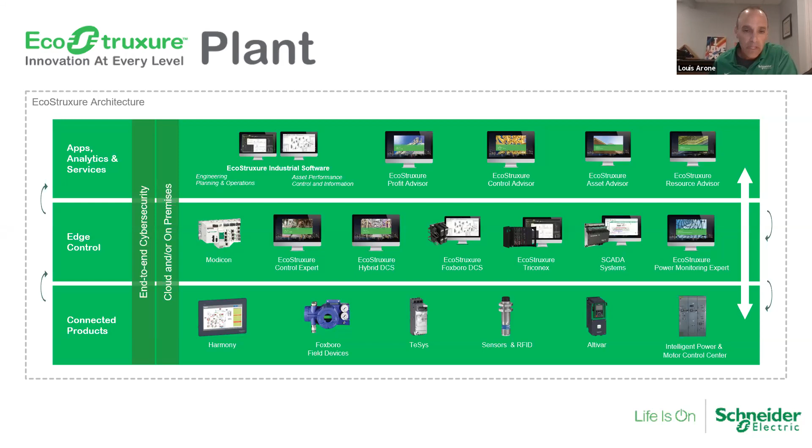We really haven't revolutionized the factory floor, and no one has, quite frankly. It's the same products. And so we believe that the future is not the same as the past. You couldn't say that really when you look at business today. I've been in the business now for over 30 years, and programming PLCs has pretty much been the same. There's been some advances in communication. There's been a change from ladder to the IEC standards.

But by and large, there really hasn't changed a whole lot on the factory floor. But in your lives, you're probably seeing a whole lot of movement, a movement from hardware-centric systems to software-centric systems. And that's really what we're going to talk about today. Industry 4.0, we've been hearing about this for a number of years now, but on the factory floor, there probably hasn't been a whole lot of revolutionary stuff that's come out when you talk about Industry 4.0. But that's kind of about to change. We talk about all the software and the apps and analytics that are coming out.

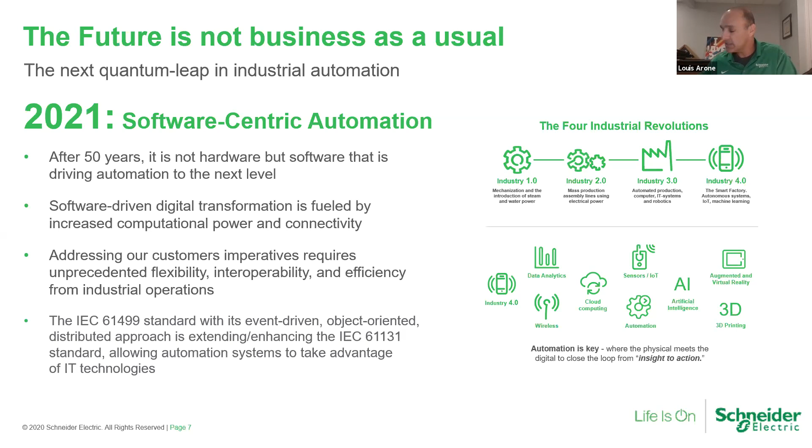Yes, that's pretty cool, but the PLC stuff really hasn't changed. Let's look real quickly at an existing system that you have today. And this, again, by and large, hasn't changed. Let me get a nice pointer up here.

So it hasn't changed. We have a PLC, we have remote I/O that's out here, and we have instrumentation or devices on the floor that are hardwired back to the remote I/O points. And while over time some of these devices have been connected via Ethernet, as shown here, really we're just bringing back a whole lot of data to a centralized PLC. The I/O is dumb. It needs to grab information from the device, and there's a lot of feedback that has to go back and forth. It hasn't changed a whole lot.

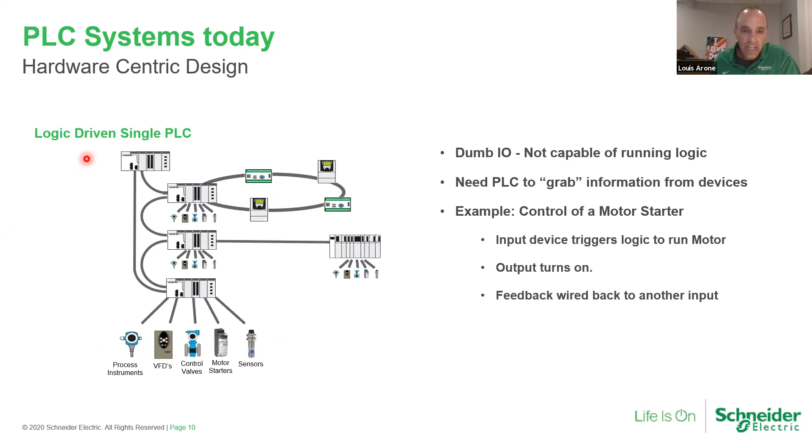When we look at the future—oh, by the way, when you look at all these smart devices that we have, we're plugging Ethernet into these devices. And Schneider Electric—if you look at a system today and the amount of I/O that you have, a lot of it is taken up by motor management, right? Between control of a motor and auxiliary contacts of a motor, or maybe you have speed feedback or something along those lines, it adds a lot of I/O.

And what you're seeing are devices today, and an innovative one that Schneider Electric has released is the TeSys island. Basically it's a bunch of motor starters slapped together with an Ethernet port. You control everything, including your auxiliaries, and a whole lot of information comes back. The only thing that's connected to these devices are your power leads. Really a fabulous device. But can we do more, right?

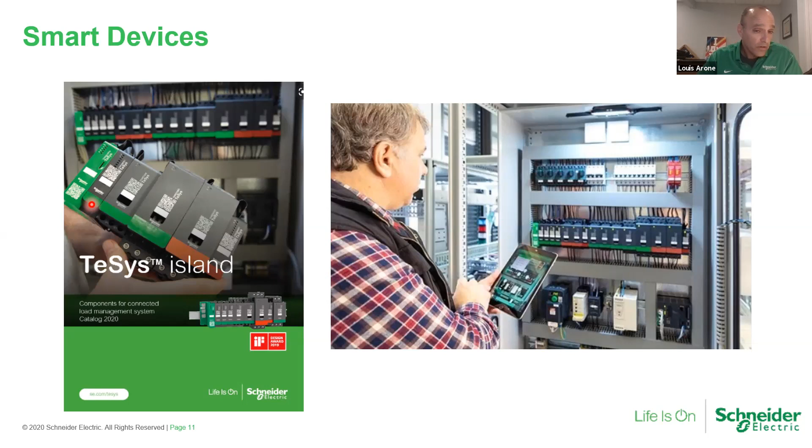Can we go that next step in our journey? Let's just pretend for a second. We talk about these smart devices and we talk about Ethernet being connected to them. In a perfect world, every device would have an Ethernet port to it. So if you fast forward maybe 3, 5, maybe even 10 years from now—I don't have a crystal ball to know when that transformation will take place—but if you look at all the devices out there and they all have an Ethernet port on it, does your PLC look the same as it does today?

Probably in the worst case, no, it doesn't. It looks probably a lot like a switch, where you have many Ethernet ports and all your devices are connected via Ethernet. It looks a lot different. In the real world, we're probably always going to have some I/O associated with it, but it looks different. The plant looks different. So forget the fact that this diagram looks like a cloud—it's not meant to be a cloud. It's meant to be your plant network where all your devices hang off of a network, and it's visible from everyone. Everyone could talk to everyone.

So today, does it make sense—if we talk about the next evolution, in the IoT world, in Industry 4.0—there's a lot of talk about edge control, moving our control to the edge. And we put our PLCs in that edge control box in EcoStruxure that you had seen. But is it really moving it to the edge? I guess so, it's on the factory floor. But can we move it really to the edge, to the point of where we're doing control? And this is where we want to talk today. This is where we feel the industry is going.

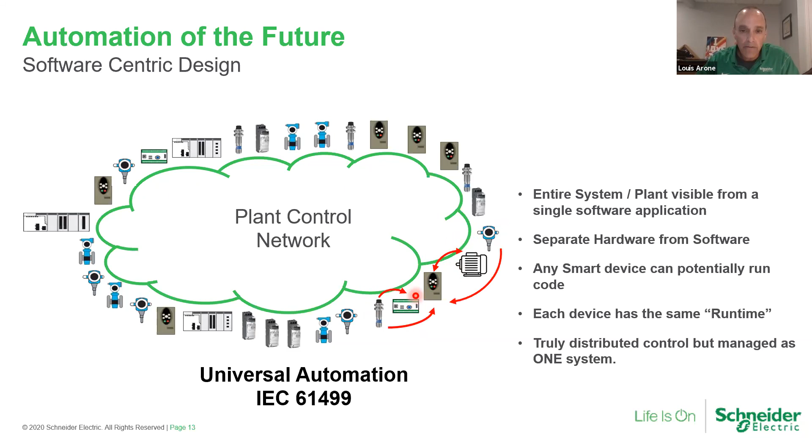But in a true distributed control, a true edge control environment, where everything is smart and everything is connected to each other, why do I need to do that? You have to ask yourself, why do I need to send that back to a centralized area? Why don't I just have them talk to each other? Why can't I send an algorithm that says, hey Mr. Drive, get your level from the sensor, get your interlocks from the instrumentation, and when these two things meet a certain point that I create, turn on, go to a certain speed, whatever. The algorithm actually resides inside the drive. So it's actually pushed to the edge.

That's really interesting, right? Now you're putting stuff out at the edge of our plant onto the factory floor. And you say, how can we do that? We're so used to creating one software in a certain location, and then it gets distributed. Like, how do we do that?

Well, what's enabling these things are standards that are coming to your factory floor. I can talk to you about Ethernet APL. Maybe you've heard about it, but it's a standard, a physical layer of a standardized Ethernet. Today, we all think that Ethernet's standard, but it really is not. There's a lot of different things that are missing from the standard, such as hazardous location, power over Ethernet. Wouldn't it be nice to have one physical layer standard in your control system?

That's what Ethernet APL is going to attempt to do. It's an organization that has many different vendors associated with it. You can go out there and take a look at it, but it handles two-wire Ethernet that can go 1,000 feet. If you have instrumentation out there that has maybe RS-485 on it, it can run over those existing wires. You don't have to pull those wires and replace them with Ethernet cables. Hazardous location, power over Ethernet.

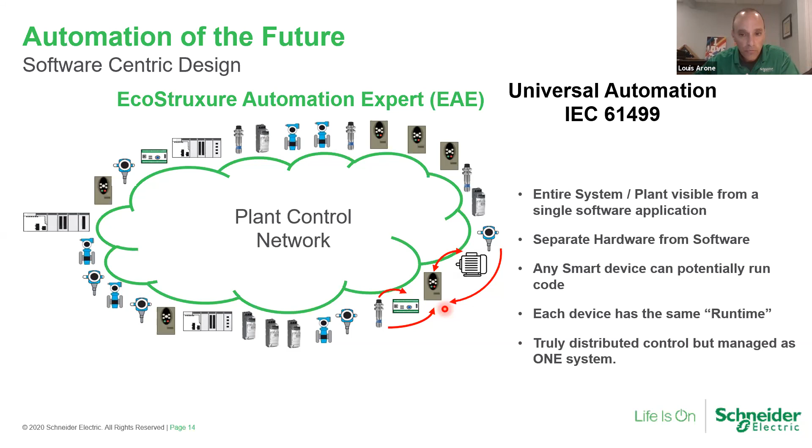Why don't we disconnect this? And so that's what this universal automation is doing. It separates the software from the hardware. It allows people to choose best-in-class products. This is not just a Schneider Electric thing. This is an organization similar to ODVA. Everyone's heard of ODVA out there. It's a separate organization run by many different vendors that are members and that form the direction of the protocols that are a part of that. Universal automation is the same thing.

Now, let's look at Schneider Electric and our offering today. So our initial offering is wrapped around 4 different platforms. One is our ATV DPAC, which is our drives, so we can put control on the edge into our drives - they control I/O and other devices. We have an M251, it's a smaller, lower end PLC, distributed I/O head based on the TM3 I/O line. We have our M580 DPAC, again, based on high performance X80 I/O. And then we have a soft DPAC, which will run on one of our IPC boxes, or it'll run on a server - it can run virtually, in a virtual machine. Highly integrated, highly flexible, and very fast.

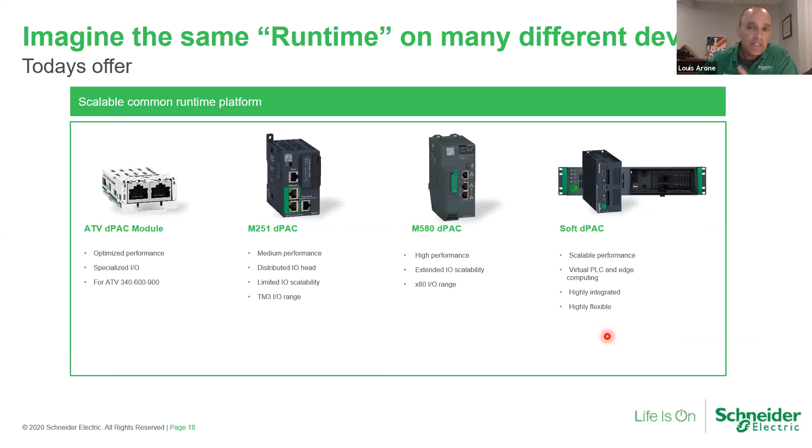So those are the 4 platforms that we have. The whole thing is to drive engineering efficiency, drive operational effectiveness, and to future-proof your investment. So again, if you're using best-in-class products, you're not stuck to a single vendor. As a new product comes out that has features that you really would like to take advantage of, you could use it. And that's really what a whole lot of advantages are.

So we're going to go through, and Frank's going to go through some of this stuff. So by the way, this EAE product is not just control - it also has built into it HMI, and it also has historian built into it. So a very DCS-like platform, but built around the PLCs. It's object-oriented programming, single-line engineering, simulation and virtualization, edge computing. We can talk directly right from the factory floor right up to the apps and analytics layer and not have to go through any kind of middleware.

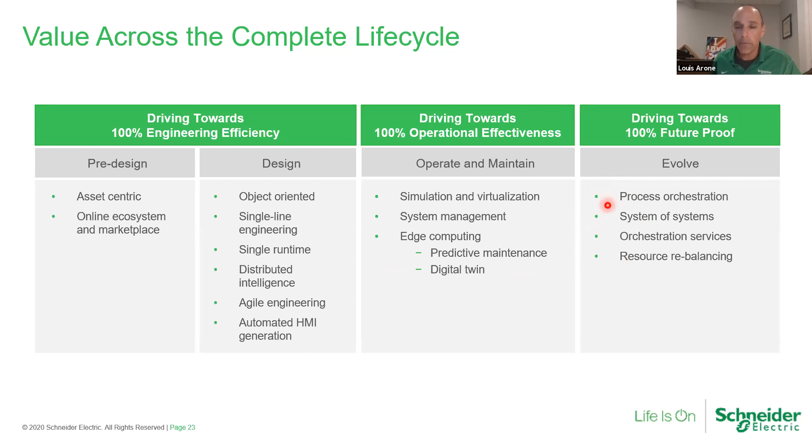And then future proofing, we talked about that. So again, driving towards effectiveness, decoupling the software from the hardware. So today, if you're looking at, say, our PLCs - if you're using our PLCs, they're very tied to the software. You can't use Control Expert without using a Modicon PLC. It just doesn't work, they're tied together. But in the future, they won't be tied together. You'll have the application, which will be EAE, and then you use your best-in-class hardware down on this side. We actually hope you choose Schneider Electric, we hope you have best-in-class hardware for you to use, but that would be up to you.

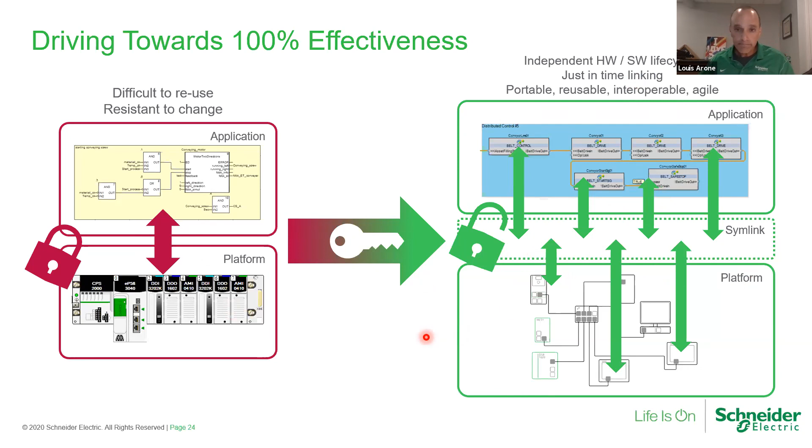So a couple of things that we want to introduce to you before we get into, Frank goes into it. It's something about a CAT, and he'll go into the definition of the CAT object model. But basically, a CAT is an object that has not only your control, but it has all your object properties, it has your documentation, it also has your visualization associated with it. And so you're developing everything at the same time. If you're not making use of the visualization inside EAE, that's fine - then you're just going to be working on the control side and maybe the object properties that are associated with it. Allows you to very quickly and easily duplicate your algorithms.

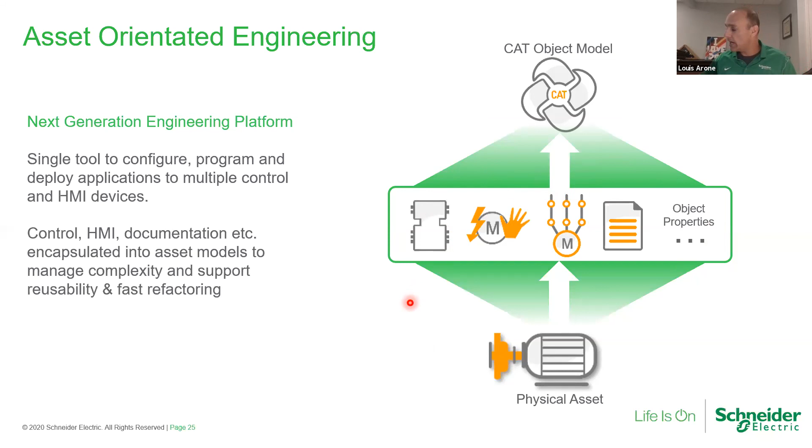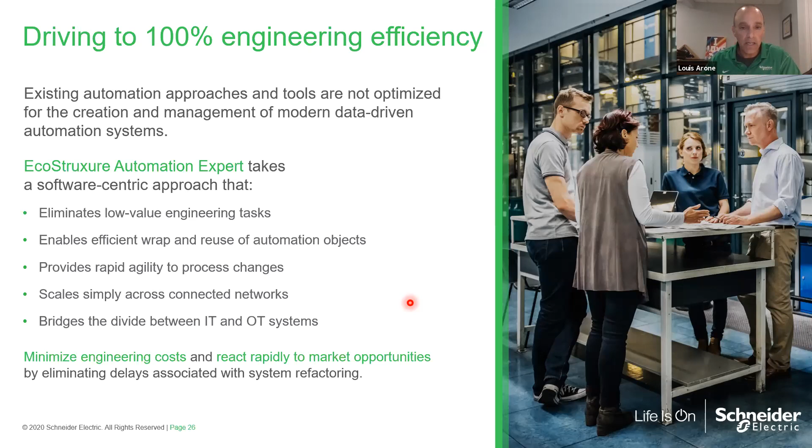Driving towards 100% efficiency. Again, object-oriented programming is all about that - it's wrap and reuse the automation objects that we have within a project or over multiple projects. By the way, we're bridging that divide between IT and OT when we go to this system because you're taking data directly up to the apps and analytics layer. And we'll show you that in a second.

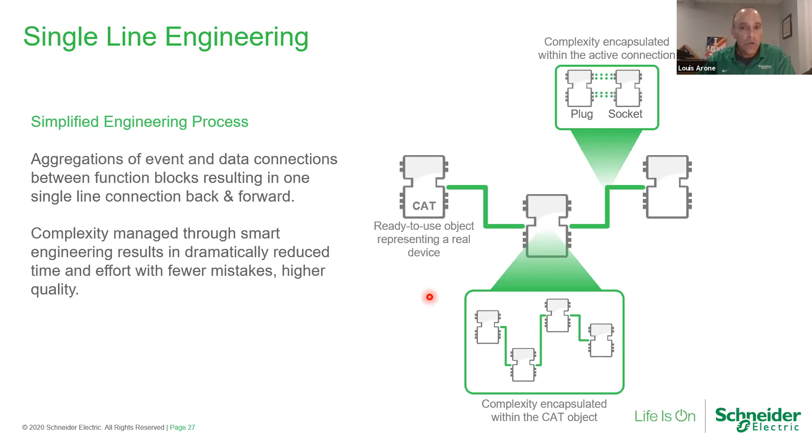So these cats are pretty interesting. Today when you're programming, you have your lines that go between your programming objects, your code, and typically that's a digital input or digital output that you're passing back and forth between your control items. But a cat is more than that - a cat has the control items built in. So these lines that I'm passing between cats are actually a pipe, and that pipe holds all the information. It passes all the information from cat to cat so all your devices can make use of that information.

Where that becomes apparent is when we start to look at our products and how they connect and you distribute them. Remember, we're programming this software as a single package, and then we distribute the control out to different devices. In this particular case, I'm distributing my control out to a drive, an ATV dPAC, an M251 dPAC, an M580 dPAC, and maybe a soft dPAC that's out there. I program them all like they were one package. I have cats that go from one to the other, passing data back and forth. And then I distribute them at the end - told them where they should go run.

The beauty about making these connections with a pipe is that wherever I distribute them, you don't have to worry about the communications - the software does that already for you. And by the way, it passes all that information, it makes that connection so that the system is already connected. In this particular case, I have a soft dPAC that makes a connection from cat to cat out to the M580. These data points are connected, the logic in here is automatically connected. You did not have to write a single bit of communication code to make this happen.

If for some reason down the pike I have to split this M580 - maybe the logic became too much for a single controller, or maybe my process changed and now I want to put distributed control in a different area, maybe it duplicated and now I want to split some of this logic up - no problem. I have my software, I take this logic and I say, you know what, I want you to deploy to a different location. That cat will automatically deploy to a different PLC, and the communications will automatically follow it. Again, you don't have to do a thing.

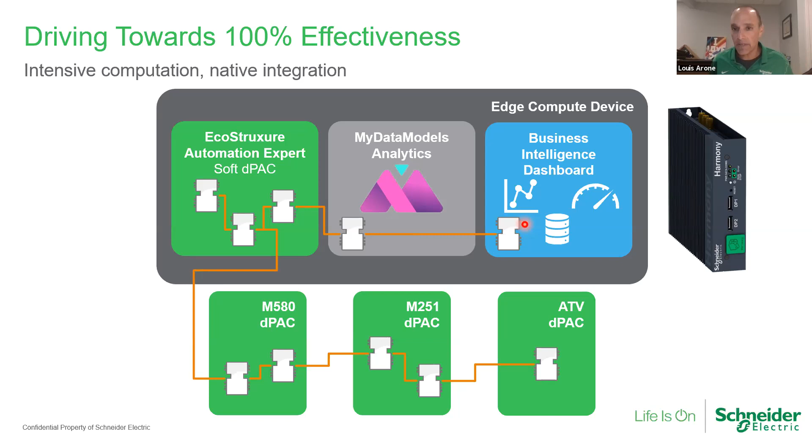So again, just to recap before I pass it to Frank: best-in-class technology, right? We're talking about native object orientation, a modular approach. We're trying to be engineering efficient, and that's what it does. We're Industry 4.0 ready - we believe the factory floor is absolutely going to all be Ethernet. Everything will be connected in the plant of the future. It may not be tomorrow, it could be 5 years from now, but it's coming. Smart factory is coming, the demand for information is absolutely coming - more and more information, more analytics, more predictive analytics on our equipment that's out there. And that's going to require a different way of looking at your software, a different way of programming.

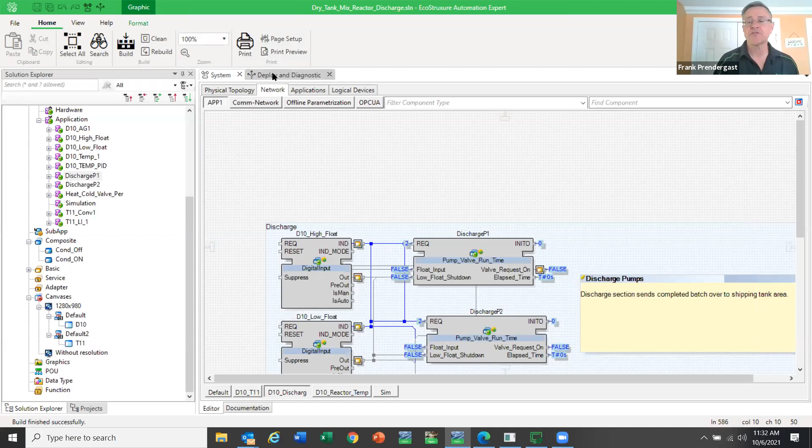I'm excited to show you EcoStruxure Automation Expert. Everything Lou talked about was part of the problem of how we manage a system. You had a central PLC communicating to its I/O - that would be one project, whether it's Schneider software or any competitor, we're all in the same boat. Individual projects for individual PLCs. So when you had multiple PLCs, you had multiple projects. The resistance to go to a distributed architecture was because of that lack of software ability - we didn't have software that looked at the system as a whole, the entire process, all the PLCs, or helped you manage it.

What I'm showing here is our Topology Manager, which shows a small system. We've got a control workstation, a soft DPAC - this would be PC-based control running on a Linux-based machine or a Windows 10-based machine, so it can be any PC basically. Your control workstation would be the build station. Your HMIs out in the field that you would deploy, because the HMI is integrated in, whether it's our native HMI built into EcoStruxure Automation Expert or a link to a Vijeo System platform. So we've got similar objects and graphics already built in.

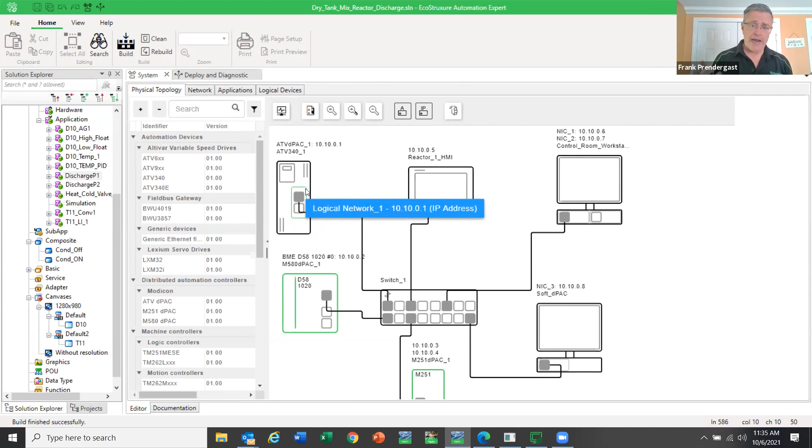When Lou showed our hardware platforms, we have the ATV DPAC, which is a small module that actually inserts inside of an Altivar process drive, allowing full control - you can put any logic you want in it. The nice part with the CAT model is you have application CATs and hardware CATs, those are the two types. An application CAT can run on any platform, whether it's the ATV DPAC, the M580, the M251, or a soft DPAC, and can be interchanged on the fly. So the first part of the problem was how do I look at everything as a system, and how do I then distribute that load - like Lou mentioned, maybe my M580 is getting overloaded. You don't have to worry about the work required to put in new hardware and map that logic to it, because it's very easy.

And I'll show you that. So when we look at this, this is how we manage the overall project, the solution, the system itself, and then how we deploy is done at the DPAC level.

So you can then deploy. What I've done is I've got a simulation running. You can have 10, 20, 30, 40, 50 PLCs or devices. They don't have to be, they can be an ATV DPAC or a soft PC. All of those are available. As you can see here, I've got an M251, an M580, a soft DPAC, and an ATV, just to show.

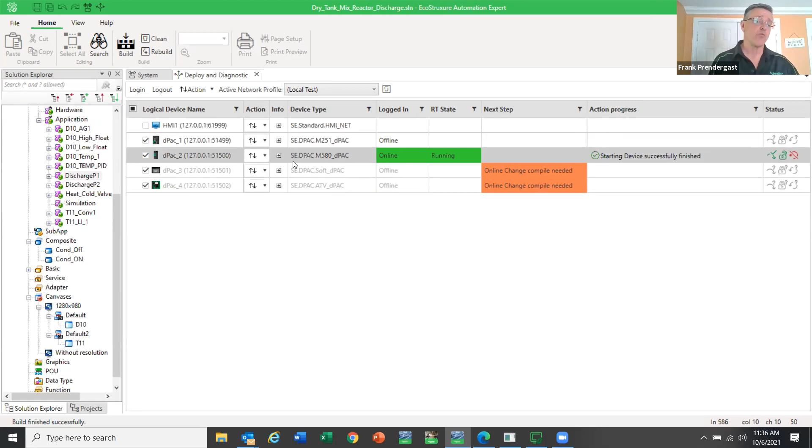And right now I've got all my logic being deployed into this one controller here. I can rapidly change that. So when we look at the system, when we look at an application, now we're looking at layers, right? Or consider them like sections. And this is where the code is, the application code. I'm going to click into one particular layer and take a look at it.

So when we look at this, when Lou was talking about CATs, which is composite automation types, they incorporate everything inside them. So alarming, for example, is not done at the SCADA side or the HMI anymore. It's done in the controller itself. So when you build a CAT, you have all of that built in.

So for example, this is a digital input, and this also is a digital input. It's a high float input and a low float input. I'm feeding that into a CAT that I made, which is a pump valve runtime CAT. And basically, I can distribute these to whichever controller I want just by going to the mapping.

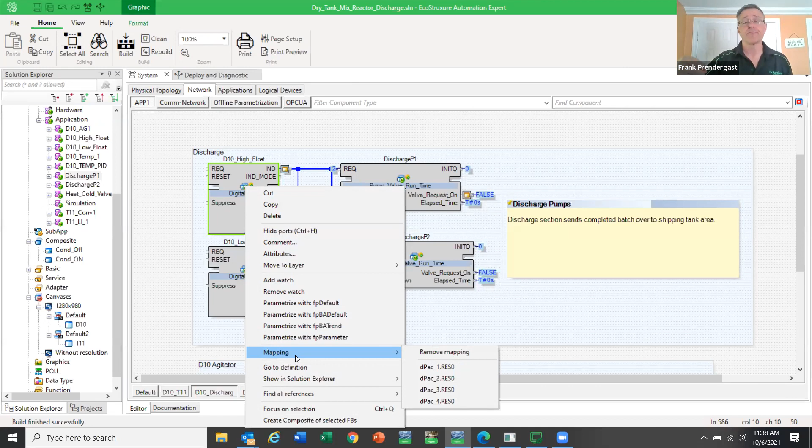So on mapping, this shows you how you can very quickly change that float from one processor to another processor. So very quickly you can do that.

And so when we looked at the factory of the future, being able to have distributed runtimes, this basically goes on a runtime on a piece of hardware like an M580, M251D. Those run the runtime, we then deploy down to that runtime. So independent of the hardware, that linkage where I connect the high float or the low float to the physical input is done at the very end, and it's completely abstracted.

So in order for me to change, say, okay, right now I've got these all allocated to one resource, but I can change this. For example, if I have a problem with that controller and that input point, I can change this to another controller, and then these links become peer-to-peer data.

So what we have is the ability to very quickly change where the logic is being solved, in which resource, which PLC or dPAC, and then the peer-to-peer communication of how those are transferred back and forth. And that's done automatically, what Lou was saying.

So think of that, in the current day, when we have multiple projects, if we have to transfer interlocking data between two controllers, we'll set up Modbus tables, or we'll do Ethernet IP as messaging back and forth. That's a pain, that's a headache. And it doesn't give us the ability to transfer large amounts of data that Industry 4.0 really needs.

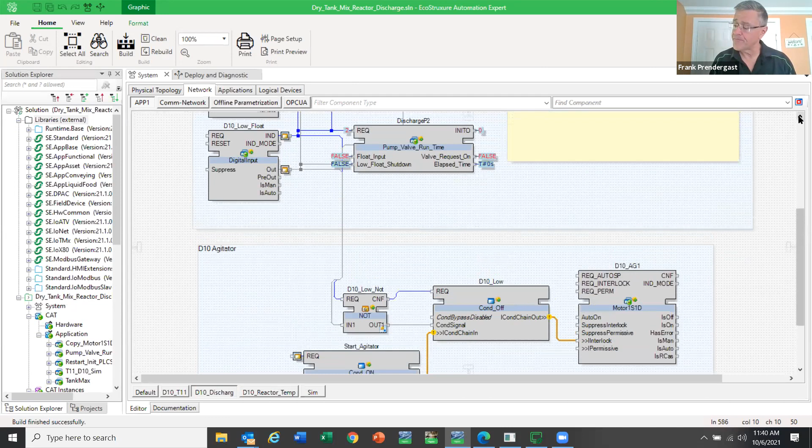So when we look at the ways to minimize those steps, transferring that data back and forth gets to be simple, and it really becomes quite easy.

When we looked at the incorporation of everything inside the CAT, typically what we would do today, whether it's us or one of our competitors, is we develop the logic and the code in a particular project in a controller. We would then export that or have a link somehow to the HMI, to the SCADA. We would then have to link the individual tags to the HMI and the attributes on the HMI.

So this, with the CAT model, actually gives you the ability to incorporate your own graphics natively. So for example, on the left here, I've got the pump valve runtime CAT that I created, and it's a pretty simple CAT. Now I'll go into it here.

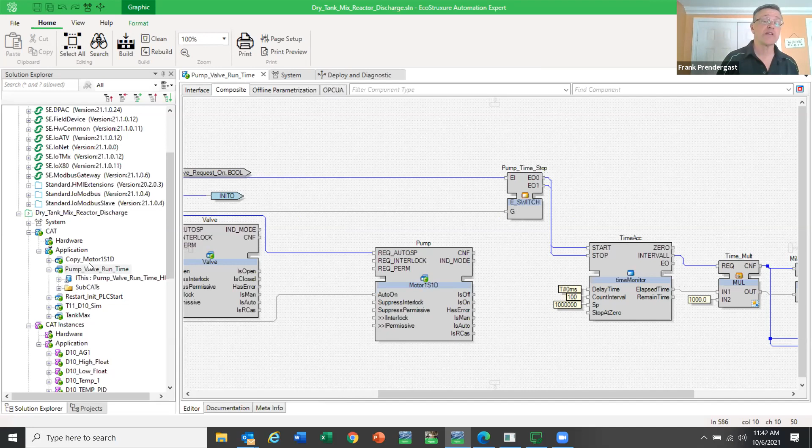Really all it's got is a valve CAT inside of it, with some conditioning signaling, a motor, and a runtime accumulator to show that. So this shows that if you have another pump and valve you want to instantiate, you basically drag over an instance, drag that CAT into a section or a layer, and give it a name. Once you give it a name, that refers to all the attributes inside that CAT and gives access to all of it. One of the big features of this is what we call single line engineering.

Single line engineering consists of creating a CAT, and you can nest CATs within CATs, and all the accessibility within the CAT from all the attributes in the CAT is available. So linkage to the HMI, you don't have to worry about.

OPC UA connection - what we didn't mention is that in our EAE runtime, it's natively built in to accommodate as an OPC UA server. So that high level of cybersecurity is there. We offer today, for example, an SL2 level of cybersecurity with EAE, so we have a certificate that you need to trust when you initially set up your system. That gives more levels of cybersecurity in addition to the functionality you have today.

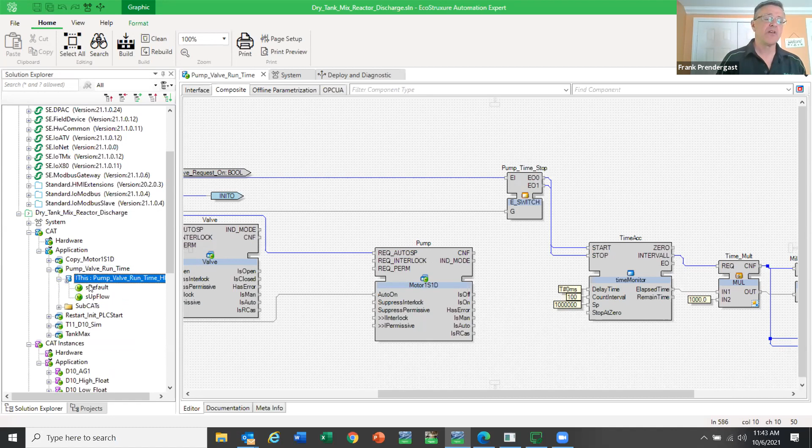When we look at incorporating inside the CAT, I've got these motor valve CATs in there, and then I can have a particular HMI view. So when I build a CAT, I've got the alarming that is inherent in the object itself, and then I've got the view that I want to display. You can have multiple - you would create a symbol, and that symbol can be whatever display you want.

You can modify - what we show here, for example, the motor copy of the motor 1S1D, is where our libraries are open to the point that you can take one of our library CATs that we made, copy it, and then change and modify it to what you want. If you didn't like the colors, for example, in the HMI, or didn't like the HMI display, if you wanted to tweak it, you can make that your own library.

When we talk about libraries, again, this goes to the future-proof concept. Future-proof really is about how we're not tied to the hardware, which is a big part, but then also how we can use the same runtime with different pieces of hardware and still run that same code. So that really makes the future-proof part of it.

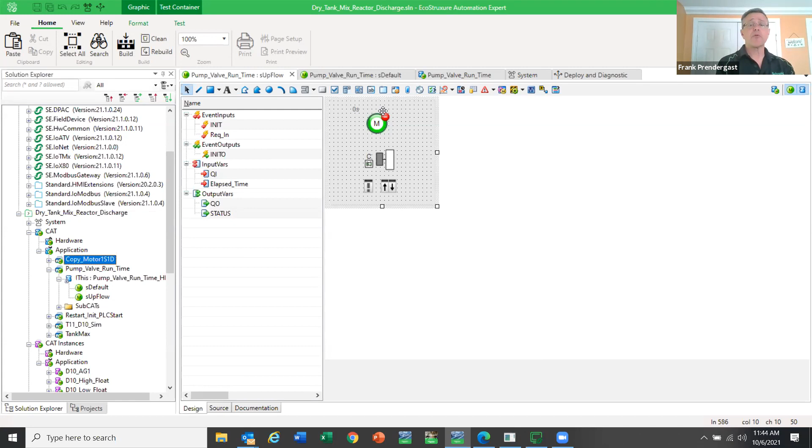With your libraries, you can lock them in to a certain version number, and then from version to version it will port when you want to go to the next version of EAE. You'll take your old libraries that are locked in your application, or used in your application, and all of that provides that ability for you.

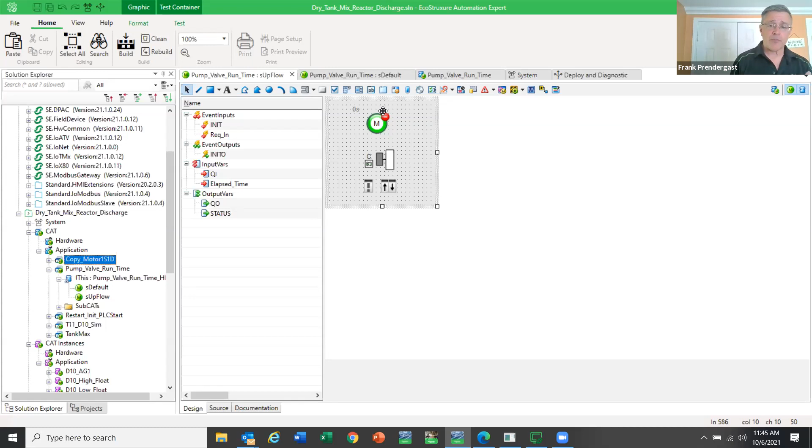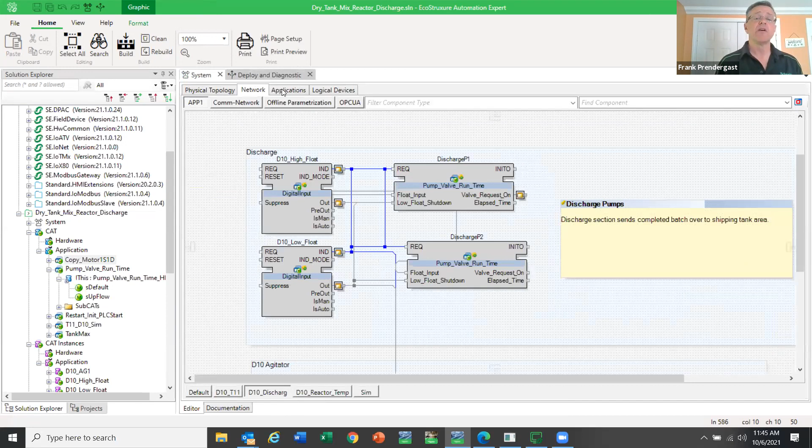The peer-to-peer communication is inherent, right? So when you link a CAT to a CAT, whether those two CATs are in the same system or in the same resource, for example a PLC, these are in the same PLC, so there's really no peer-to-peer, it's all handled within. Change one of these over, and automatically that peer-to-peer messaging is taken into account.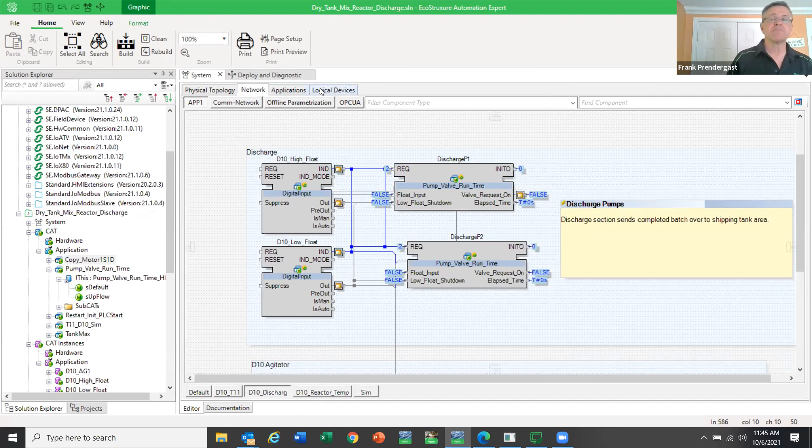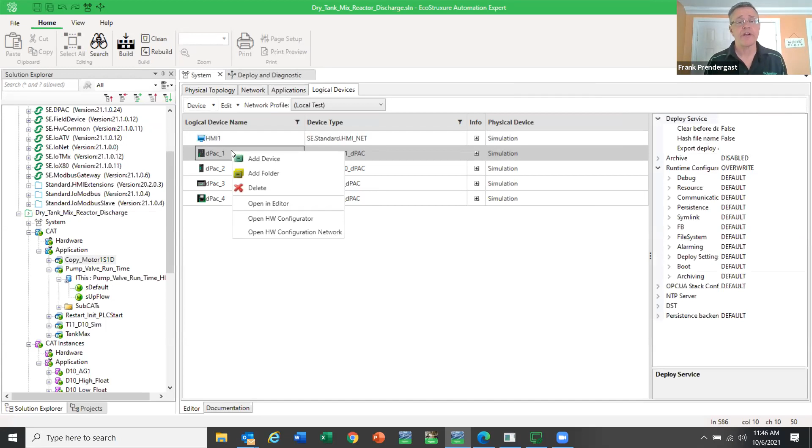Let's take a look at the hardware abstraction layer. So there are application cats and hardware cats. Application cats are completely independent from the hardware, not tied whatsoever to it, and they can run on any runtime. A hardware cat is specific to a piece of hardware - for example, an M580 cat, or an M251 cat. When you install the hardware cats, this gives you the ability to map the IO.

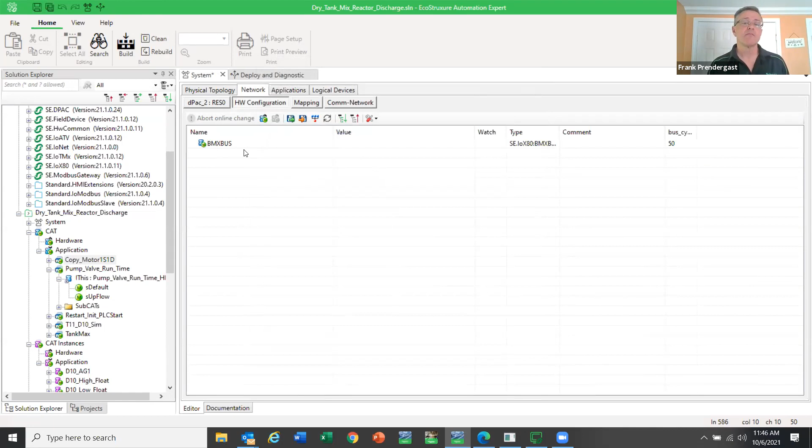Let me see, where's the other one? So I'm going to map, for example, I'm going to add an M580 X bus. Actually, you know what, I'll go back. So this allows you to configure the hardware to say, okay, what IO modules do I have?

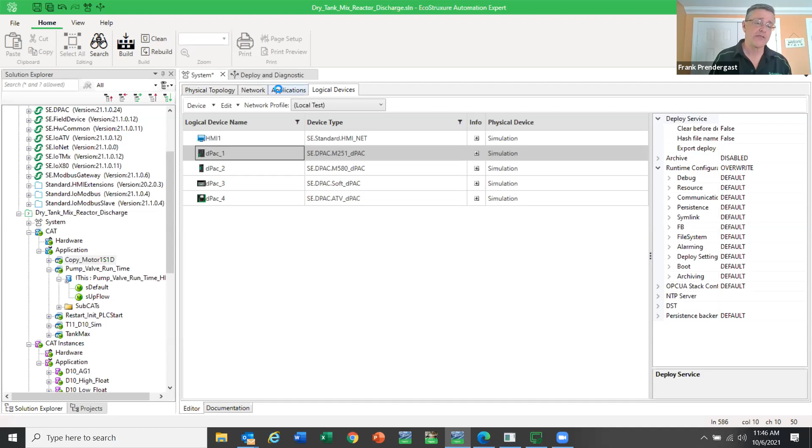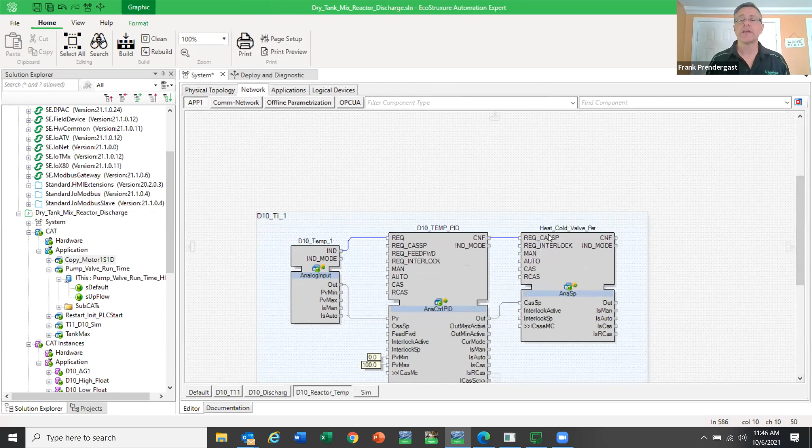Then after you've done configuring the individual modules, scaling on the modules, all the inherent stuff, then what you're going to do is link using what we call our symbolic links. The symbolic links then tie to the attributes in the particular application. So, for example, the output of this analog set point is a heat-cold valve, and that can be linked to an output, for example an analog output.

That linkage is what makes it so easy to have a truly distributed system, because you've decoupled the hardware from the software. The only link is that symbolic link that ties the hardware to that. So again, that makes you able to distribute the load very quickly.

Think about if you had multiple, let's say 10 PLCs. One of the PLC systems you have today is getting overloaded, too full with logic. It's slowing down, you need it to be faster. Distributing that logic over to another project, what a pain, right? You got to manually move the code from one project to the other, then do the hardware mapping. It's quite extensive on what you need to accommodate, and lots of mouse clicks. So single line engineering gives us the ability to really encapsulate everything in a system so that you can readily duplicate it. That makes it so much easier to handle.

The IT linkage, what we needed with our new generation of PLC programming with EAE, is the ability to look at IT technologies. How we can very rapidly get access to all different protocols like MQTT, for example. How do we link to a database, call a DLL? We really didn't have that kind of capability, and the existing system we have today doesn't show you that. So the complexity of that, or the lack of being able to connect, really limits the amount of data you're able to get access to.

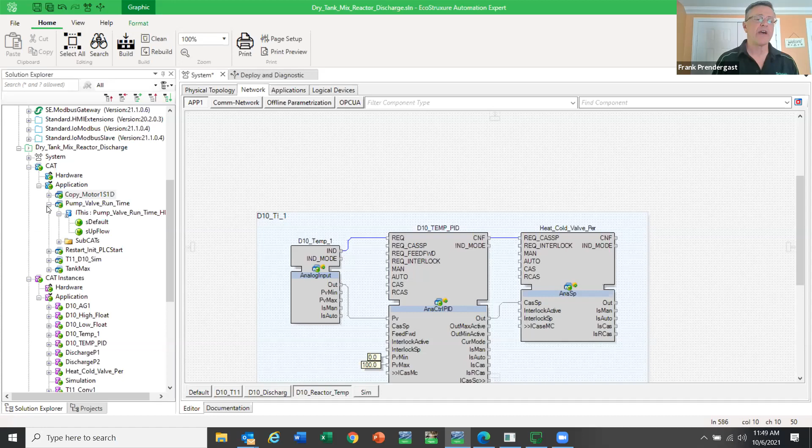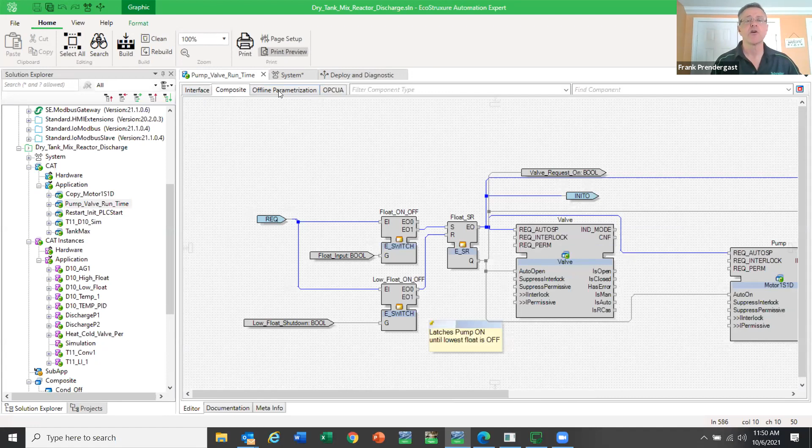We've got 3 types. We've got a CAT, the composite automation type. When we look at that CAT, that really gives you everything—it gives you the offline parameterization, for example, gives you the interface, what input pins, output pins they are. Look at the composite being what's the logic and the code inside. Offline parameterization is kind of like the initial values storage. And then access to OPC UA, so it gives you whether or not you want to expose it to an OPC UA client, for example, or not. All of that is built into the CAT model.

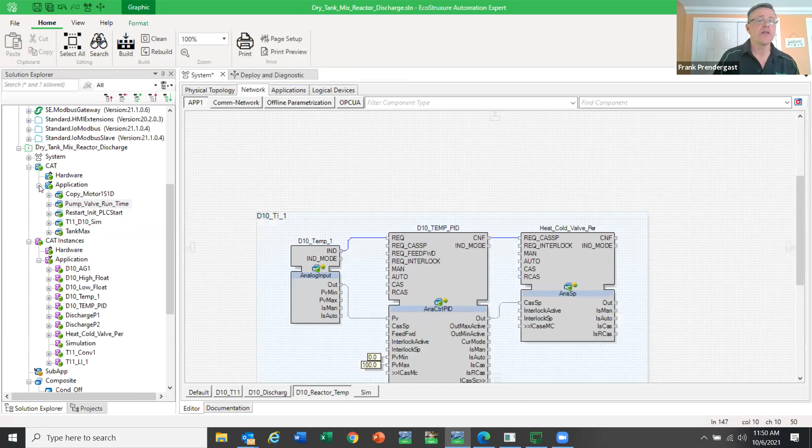We've then got underneath that another type of object, a composite type. An example of a composite really looks about the same as what you had with a CAT, except you're missing the offline parameterization and the OPC UA. That really is the difference between a composite and a CAT.

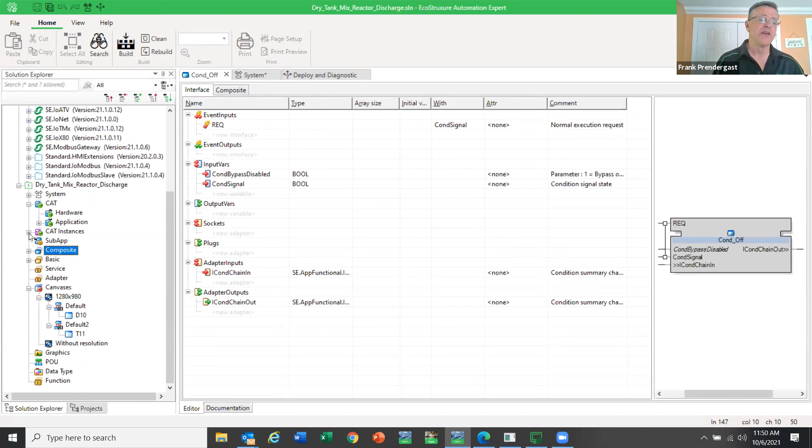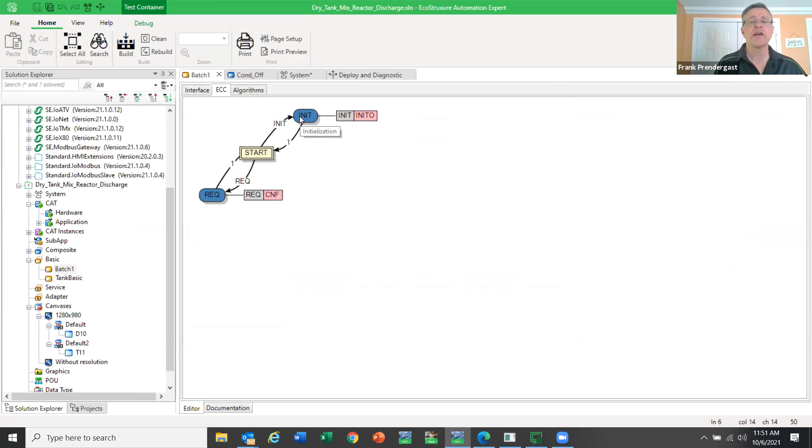And then a basic function block gives you the ability to run what's called ECC, execution control chart. So basically, when you look at the interface, you have the input events coming in, and then you have the data. When the input event comes in, for example, when I get a request input event, it will fire the request algorithm. In this case, when I get an init event, it fires the init algorithm, and the algorithms are here. Now, what we didn't talk about yet is the IEC 61499 is really a superset of the IEC 61131.

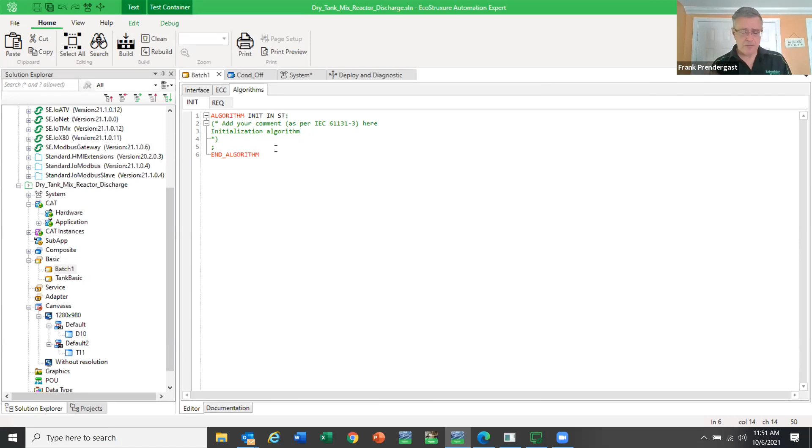So inside of the IEC 61499, you can program in structured text, for example. You have that function block programming capabilities. You've also got, to a lesser extent, ladder. Structures are supported, adapters are supported, all of that. This gives you an example of what a basic function block looks like. We have service blocks, which are much more tied to the hardware. Adapters, which are when Lou was talking about the pipes, the links between CAT to CAT—an adapter is basically a glorified structure. It gives you the ability to either process and send back and forth arrays, or to give any access to it.

When we look at Canvas, the Canvas is the HMI part. So what I'm showing here is what I created from the logic. Everything except the tanks, these 2 tanks, and the piping are CATs. They're already pre-made, so I didn't really create this—this CAT is an accumulation of a motor for a pump, whether it's a motor for an agitator or a motor for a pump and a valve.

But basically, this is all done. So very quickly, you can put together a very quick process and automate it. So you have this standard HMI. I instantiated the CAT objects onto a layer. Then, after I built and deployed to the controller, I can instantiate the instances of those CATs that I just made on the screen, and that provides this.

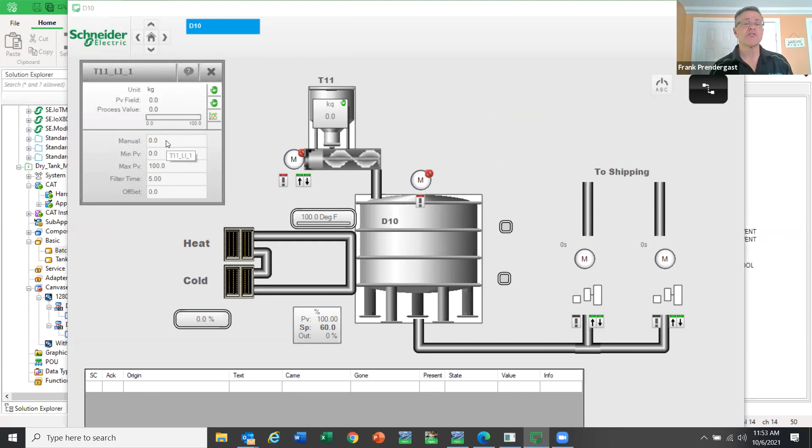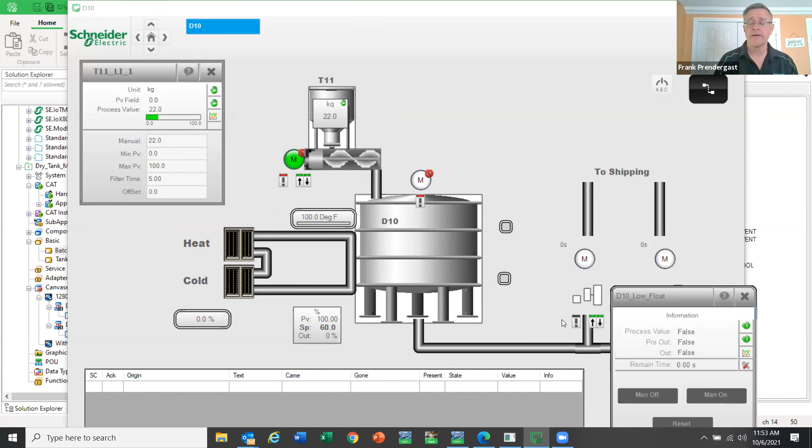Automatically, I've already got my pop-ups, for example. I had logic set up to say, if I don't have anything in the tank, shut off the conveyor. I've got digital inputs, for example, the low float and high float. Down here is an automatic alarm banner. The cats embed all of that alarming natively, so all you have to do is drag an alarm banner on. When any of the cats are sensing some sort of an alarm, it'll pop up there for the operator. So it makes it really easy to accommodate any kind of alarming need.

So I'm going to put that into manual mode, trigger the low float. That'll turn the agitator on. And I've got interlocks, for example, that are built in. Very quickly, just by naming the instances of the block, it will automatically send that data up to the HMI, so I don't have to put in this text. I call this D10 low float condition off, and that basically automatically does that.

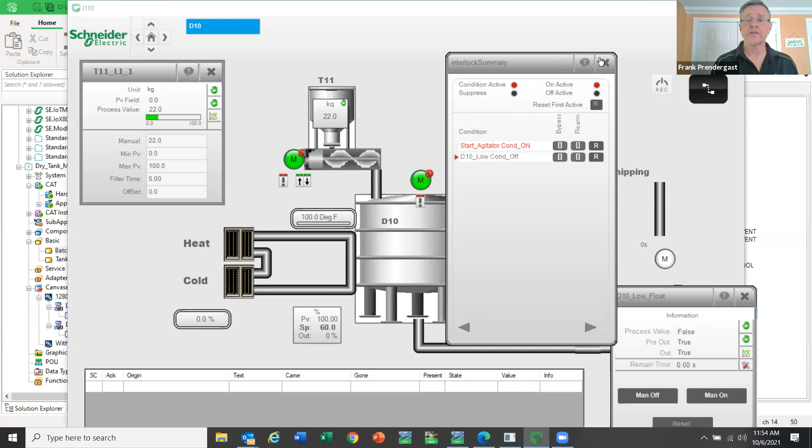So again, ways to reduce low value engineering is a big part. Ways to be able to link this information to data, so your visualization can link into other type devices. All of that is incorporated. When we trigger the high float, turn that on, then I'm going to have my pump and valves basically start pumping. All of that is done automatically. Very quick to instantiate.

So when we look at the link to the HMI, what I showed here is the native HMI that's built in to EAE. We also have, if you have an AVEVA System Platform, the ability to make a connector, and the connector makes that connection over to the individual objects that are already part of an AVEVA System Platform. So again, very quick to link your visualization to your individual items.

Let's see, we're getting close to the top of the hour. I think we want to leave a little bit of time for some questions. I see there is some questions in the chat.

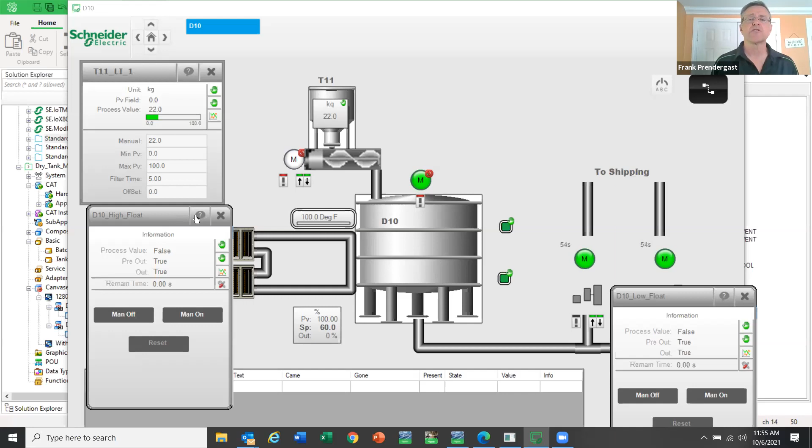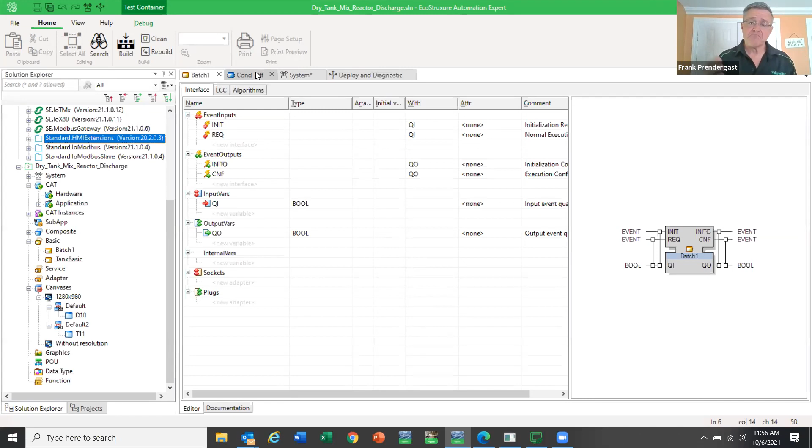There's a couple of answers to that. Great question. The first is that this is very scalable. What DCSs are great at is humongous systems, right? 100,000 points of IO, tens of thousands of field bus devices, large, really large systems. This can be as scalable as one small controller to 40, 50 controllers, for example. I see, for example, we have Foxboro DCS with Schneider, great for those large end systems, those really big systems, but DCS doesn't really scale down to the small side. So this is really designed for the small side and the medium side.

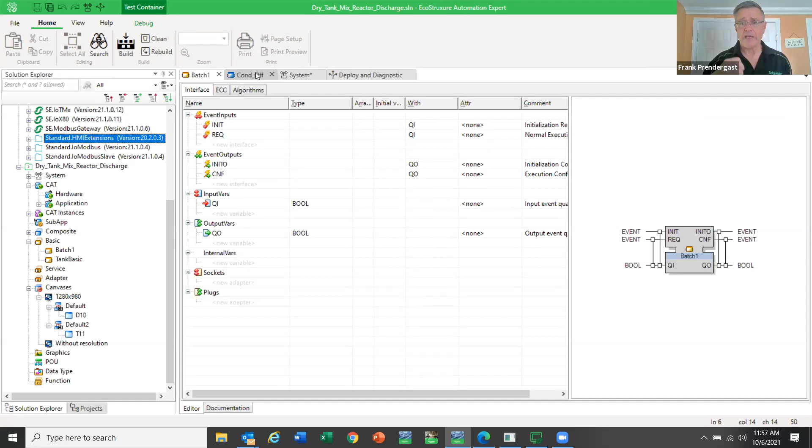And then with regards to your question about the open standard, yes, any device, any piece of hardware with the EcoStruxure runtime, this can be deployed to. And then the linkage would be done by a hardware CAT. Hopefully that answered your question.

Yeah, if I can add to that a little bit on the openness, the concept of universal automation, as Lou presented it, really tremendously opens things up, because now you've got multiple vendors that all support the same runtime. So literally any device out there that adheres to that standard could be made a part of this system. And so it really unlocks the vendor lock that you have here, especially in DCS systems. They're famous for that. Great point, Jerry.

Any other questions, Lou? No, there's no other questions. Let's see. So I guess I probably have just, we'll probably end on this.

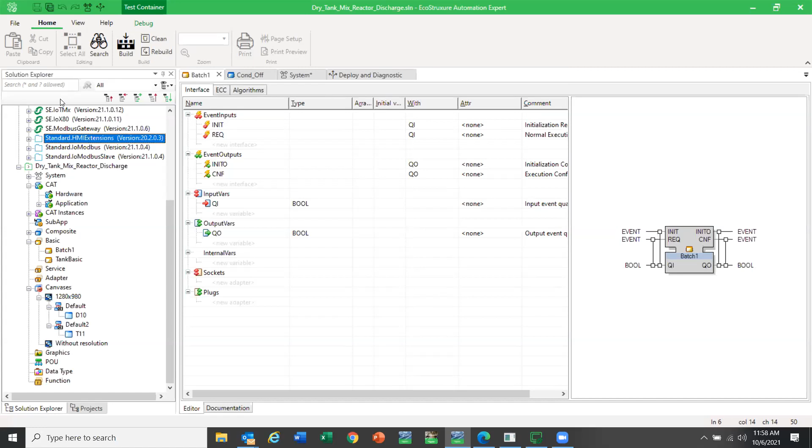This is, we're getting towards the end here. There are probably some of you out there saying, you know what, this is probably never going to happen, blah, blah, blah. And for those, I would say that when you look at your systems today, and you look at your personal life, for example. Look at your home. Five years ago, ten years ago, there was nothing smart inside your home. And today, you can't go and buy appliances that aren't. I just did that, as a matter of fact.

Almost all the appliances today have some type of connected devices to them, right? You can connect your refrigerator, your stove, your oven, your microwave, all that stuff gets connected. Well, you can argue why I need that, that's fine. But the factory floor really has not undergone that type of revolution ever. It's pretty much the same for the last 40, 50 years. Hardwired I/O, we've had a couple of Ethernet things, we've made some changes in the IEC languages to make things better, but we really haven't undergone that tremendous change. And the time is ripe for it.

So if you look at all the environment, the things that have changed on the factory floor, the proliferation of Ethernet everywhere, the standardization now with the Ethernet APL, the way we can communicate to all kinds of devices, it just lends itself for that next step.

Is this going to happen tomorrow? I want to be clear, it's probably not going to happen tomorrow. We all know end users, right? It takes a while for that to change over. Nobody's got endless amounts of money to go ahead and change over. But that slow progression towards the smart factory is absolutely happening.